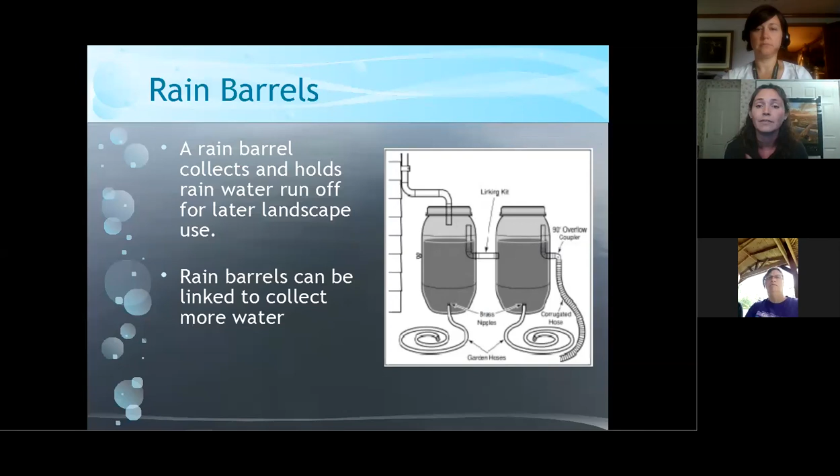A rain barrel is a way for us to collect rainwater that's coming down. It allows us to collect it and store it for later use. You can have a single rain barrel, typically ranging between 45 and 60 gallons per barrel, or you can link multiple rain barrels together in a daisy chain to increase your capability to store that rainwater. Rain barrels have a lot of benefits.

When we think about storing rainwater, why would we want to do that? A major reason from an environmental standpoint to use rain barrels is to reduce stormwater runoff. Think about every time we have a rain event, that rain has to land somewhere. It might land on a grassy field where the soil can soak in some of that water.

But a lot of times it's falling on an impermeable surface. Think about the world we live in today, especially in an urban or suburban area - we have rooftops, pavement and asphalt that cause that water to run because it can't soak into those surfaces. That water gets diverted down into our storm drains, and that storm drain carries that water out to your local stream. If it doesn't make it into the storm drain, it can run across your property.

You see in some of those photos, as we increase the amount of water running off these surfaces, the speed increases, the volume increases, and it starts to carry a lot of soil with it. Then we can see a lot of erosion problems. We can have drainage issues, flooding issues, and water can cause a big mess if it's allowed to build up in this manner.

The erosion you can see in the bottom right picture is kind of an extreme circumstance - you see the house with the porch on the stream bank, and you can see heavy erosion coming off of that stream bank.

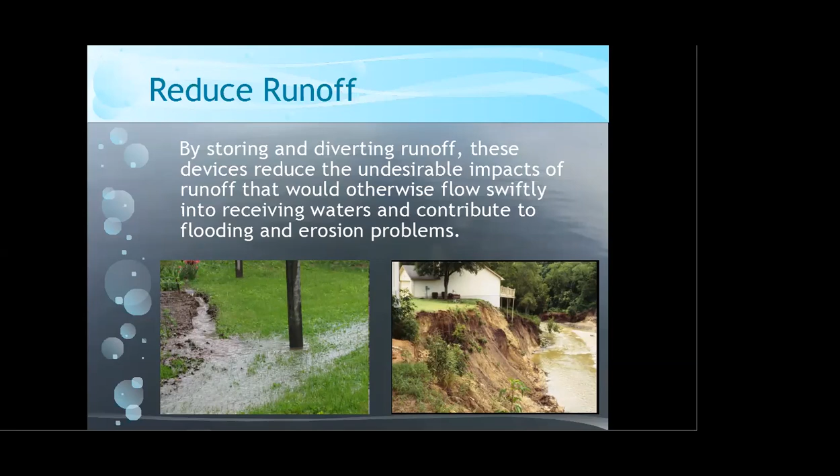Not only does it take the soil with it, but it also takes any type of pollution that is on that soil or on the ground. When we talk about pollution in our environment, we talk about point source or non-point source pollution.

Point source basically means we can point to where that pollution is coming from - for instance, a particular factory, or we can say this chemical is coming from here. But over half of the pollution problems we see in this country, the EPA has attributed to what we call non-point source pollution - that's the pollution that you and I make every day. So let's think about those different types of pollution contributing to non-point source pollution.

Sediment is our number one pollution issue. That's all the soil we saw in the previous photos from erosion getting carried by the water. When we look at the Ohio River's number one pollution problem, it's sediment—all of this extra soil washing into the waterways. Now, all of this soil causes several different problems.

Let's think about the river as an ecosystem. Things live in the river. So when you have animals such as fish that use gills, those gills can get clogged with soil, and it can actually cause fish die-offs. It also causes issues for other aquatic animals in the stream system.

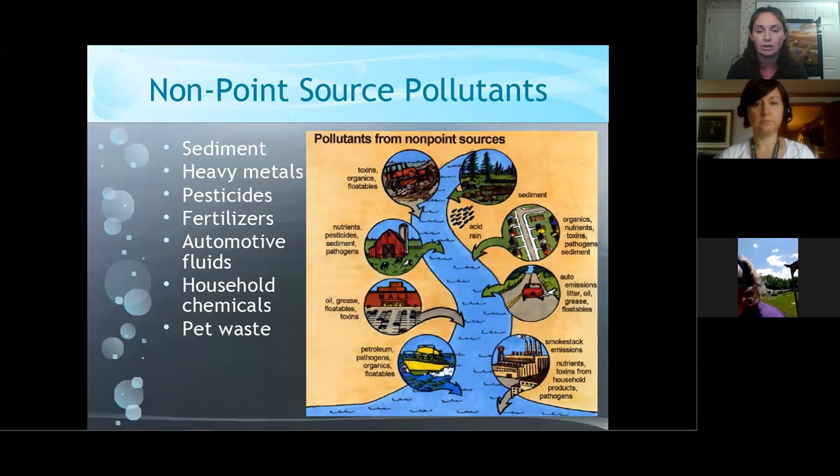It also helps conserve water and conserve your money, and I think we're all always looking for ways to save money. When we think about how we use water around our property, whether watering flowers or a garden, municipal water systems show that about 40% of domestic water consumption comes from these practices.

Especially during high water use months, like summer here in Ohio, when we're using a lot more water because it's the drier season, by using water we've collected and stored in our rain barrels, we're not using as much water from the municipal system, and our water bill ends up a little lower as well.

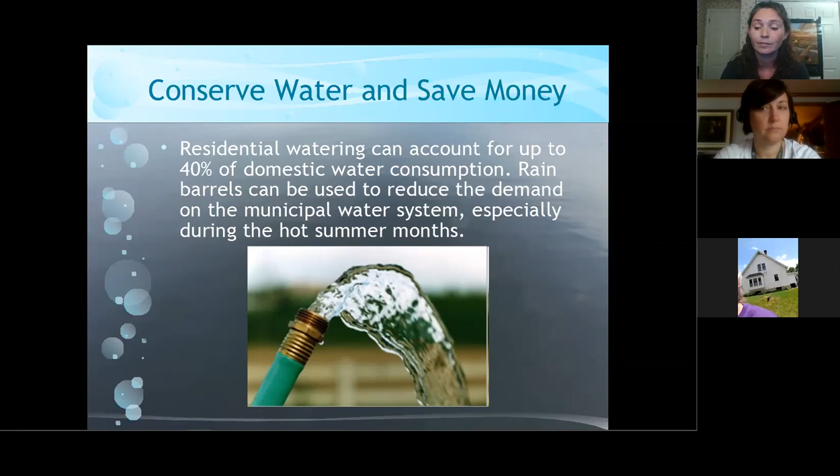Now we can use that rainwater for lots of things—again, watering our lawn and garden, this is just natural rainwater. It's great because it's what would have been watering the garden anyway on a rainy day, but we have a little bit of control and can water it when our plants actually need it.

You can also use this water for different kinds of washing—you can wash your windows, wash your cars. I've even had people tell me they like to wash their hair with rain barrel water because it makes their hair softer.

If you're doing that, big thing to notice is it's not for human consumption. This is not water you want to fill your drinking bottle with. It has not been sterilized or filtered, so we don't want to consume it. In fact, a lot of kits for creating rain barrels come with labels you can stick on just in case you need that reminder not to drink the rain barrel water. But it is very useful for a lot of different things.

Now, we've got the benefits of rain barrels, we know why we want to use them. But how much water can a rain barrel collect? Well, mathematicians have helped us out with this, and we have some formulas we can use to do these calculations. So here's an example.

First, we have to know what is the size of the area causing the runoff. In the case of rain barrels, it's often our roof, the impermeable surface the water runs off of into our gutters and down into our rain barrels. For instance, if you have a 1,000 square foot roof, then a one-inch rain event can produce approximately 600 gallons of water. So a lot of water can be running off of our houses.

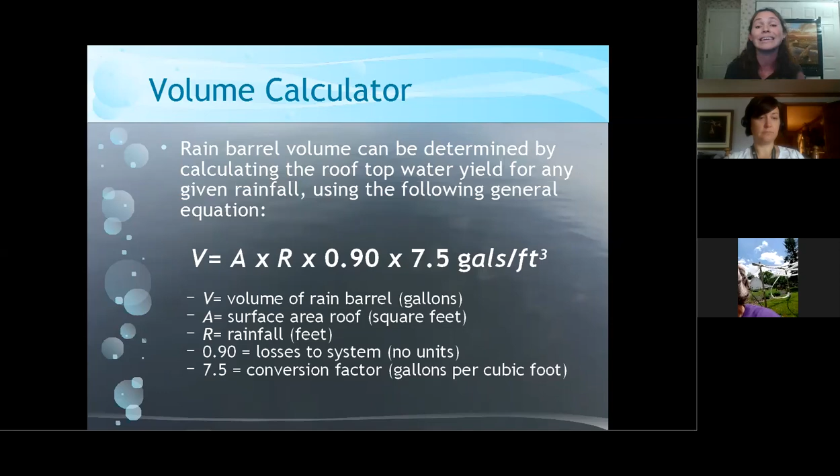To look at another example: if I get a 60-gallon rain barrel, then I know it can handle approximately a half-inch rainfall event if it's connected to a downspout where the roof is giving us about 215 square feet.

So when thinking about installing rain barrels on our property, we have to consider which downspout we want to attach our rain barrel to, because that's what's feeding water into our barrel. You have to look at your roof and how it's sectioned off, which way the different pitches of your roof run, and then estimate, for this particular downspout, what area of roof is contributing water to my barrel. This gives you an idea of what size barrel to place in that area, or if you need multiple barrels. It really depends on what you're going to use the rain barrel water for, and how much you want to have stored on hand.

Besides which downspout, there are other things to consider about where to place this barrel. For the rain barrel, we want it on a sturdy raised surface. The reason we say raised is we have to think about pressure. With a rain barrel, gravity is what gives you your water pressure. So if you want to hook a hose to your rain barrel to water a garden away from it, an elevated rain barrel gives you more water pressure passively. The more full your barrel is, the more pressure you get, but raising the barrel also helps increase your pressure.

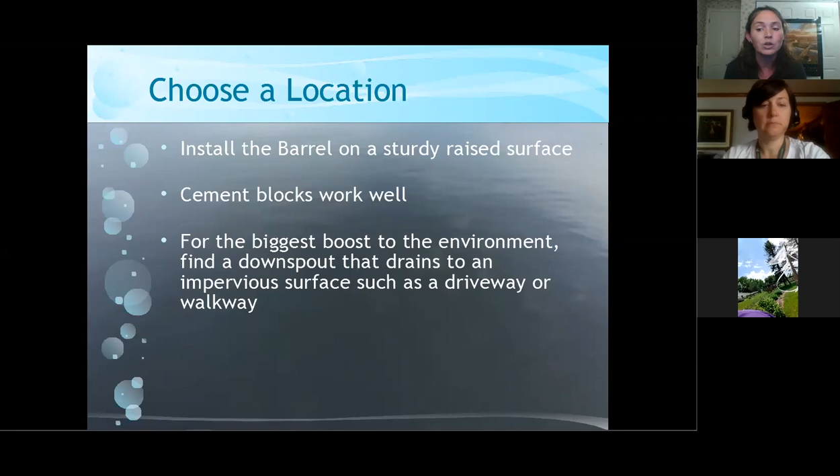When thinking about which downspout we're going to put the rain barrel on, we can also think about that from an environmental standpoint. Think about those hard impermeable surfaces we talked about. If you have a downspout pointing toward your driveway, which runs straight out to the gutter and down the storm drain, placing a rain barrel there can have a bigger environmental impact because it reduces the stormwater flow going directly into that storm drain, as opposed to a downspout that's already running into a grassy area and allowing that surface to soak in some of that water. That's something else to consider when deciding where to place your rain barrel.

Some safety considerations of rain barrels: a lot of times people are worried about mosquito breeding when thinking about stationary water sitting in one spot with a closed rain barrel system. The kind of rain barrels we actually get from our suppliers are rain station rain barrels, and they have a lid that goes on top, a domed lid to encourage water to run off.

If you're using a different type of barrel, and there are lots of different options out there that we'll look at, you might have one with a little lip on top where a bit of water could start pooling. You can drill a small hole through that lip to allow it to drain out. Some styles also don't hook into your downspout, but rather the downspout just drops into an open top of the barrel. If you choose an open top barrel, we really recommend putting a fine mesh covering on top to prevent mosquitoes from getting in and breeding.

With the rain station closed system rain barrels we have, because of the way it attaches to your downspout, when it overflows, the overflow will just continue down your downspout and discharge wherever that downspout is pointing. However, if you cut off your downspout and put in an open top rain barrel, if it overflows, is it going to overflow next to your house foundation? Because water, just like it can erode stream banks over time, will weather and break down the concrete foundation of your house. So you want to be careful about where the water is going to overflow to.

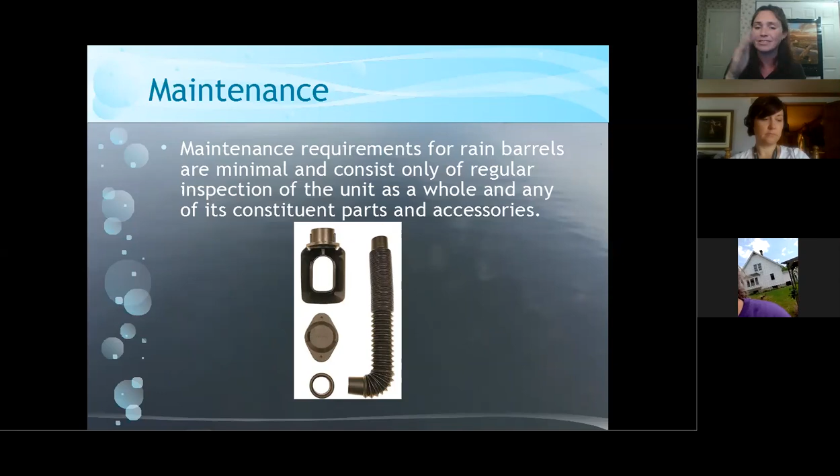In this picture, these are a few pieces that come in what's called a diverter kit. Diverter kits are ways that you can turn different types of containers into a rain barrel. So you've got hoses, you've got plugs, and these are rubber. They hold up for a long time, but over time they can start to crack or break. If you don't have good seals, your rain barrel is not going to work appropriately. So you may have to replace single pieces of the system over time, but generally you're just inspecting to make sure everything is good and secure and snug fitting.

You also have to think about where the water is coming from to my rain barrel. If there's a lot of debris on the roof, or in the gutters or downspouts, that can impact your rain barrel. If any of you out there are like me, I know when it comes time to cleaning my gutters, that is not a job that I'm looking forward to. However, because I want the benefits of my rain barrel, it's kind of an extra motivator for me to make sure that I'm staying on top of keeping my gutters clean.

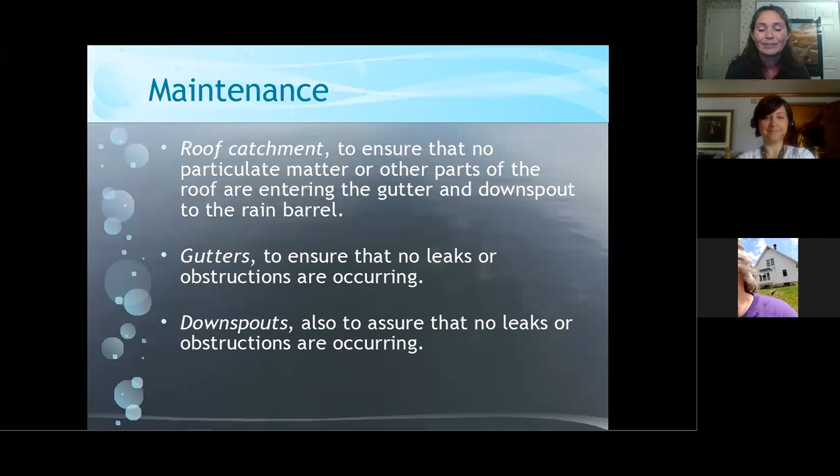You also can check the entrance to the rain barrel. In this picture, this is showing that rain station style closed system — you can see the hose that is connected into the downspout there. You just want to occasionally make sure that there's not obstructions in there that would be preventing water from getting into your rain barrel, and also check the top of that rain barrel for any leaks or for that seal.

Now with these rain station rain barrels, you might have noticed in the very first picture at the beginning of the presentation that these tops can actually turn over and you can plant flowers and things in the tops. It makes your rain barrel really beautiful — it's another place to plant flowers. So that's another option with these rain barrels. But even if you do that, you still want to make sure that the seal around there isn't allowing things to get into the barrel.

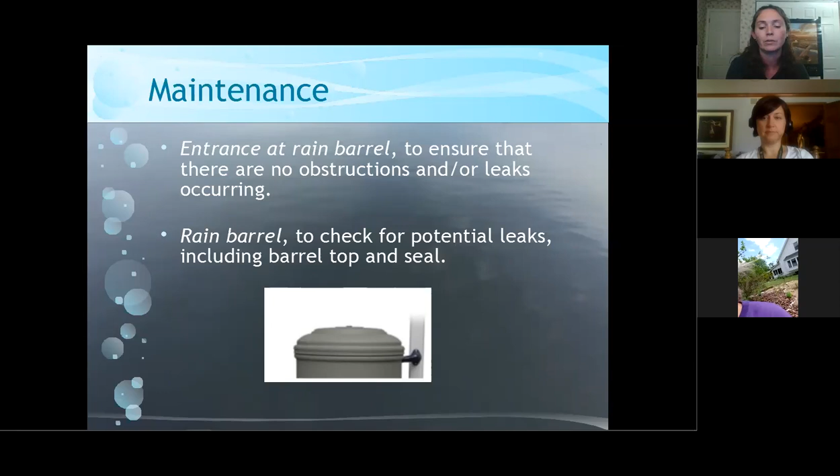Again, all those little pieces — your overflow pipe, is my spigot working correctly that I'm going to use to get the water back out of my barrel? Any accessories? Do I have multiple barrels that are linked together? I'm just going to check those hoses to make sure that everything's working properly. But other than that, your rain barrel system is just going to collect rain for your use.

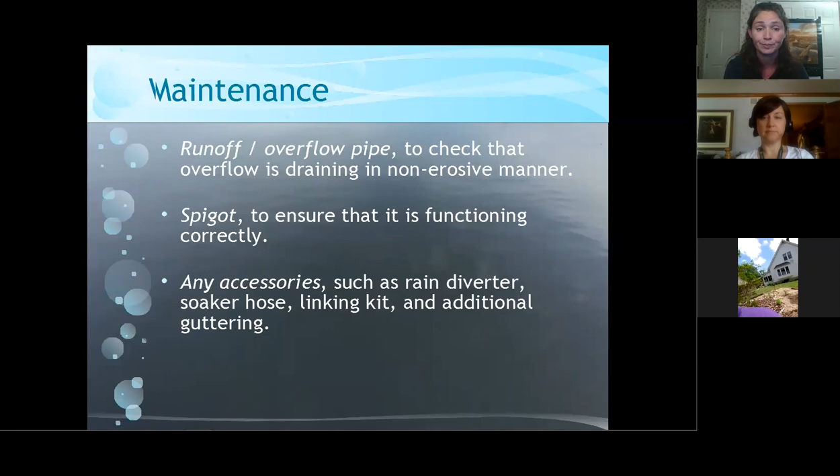Here in Ohio, we do have to think about winter prep. Obviously our winters can get pretty cold where we're going to have freezing. What we recommend is that in the winter, you actually disconnect your rain barrel from your downspout. You will get pieces in your diverter kit that actually will plug up your downspout for the winter time. This piece — what I recommend is have a place in your garage or a shed that you kind of store it, because it sometimes just walks off and then you can't find it come winter time when you're trying to winterize your rain barrel system.

So just kind of have a place for it. But again, if it were to become lost, these individual pieces of the kits can be purchased — I think that particular piece is like $6 to $8 on its own. We recommend that you either empty the barrel completely and leave your spigot open, or some folks choose to maintain it at about half full. You just want to make sure that the amount of water in your barrel is enough that it's not going to freeze easily. I tend to just empty mine to make it easier.

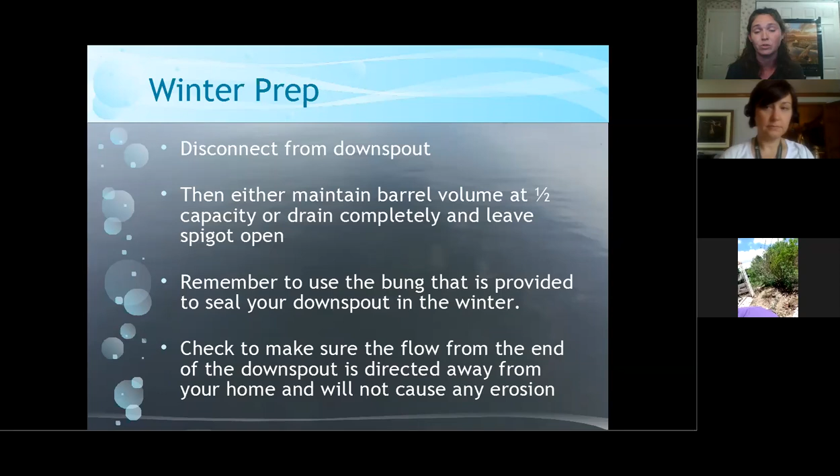Again, when you take the barrel off, especially if you have an open top system where the downspout was just draining into the barrel, think about: if I remove the barrel, where is that water now going for the duration of the winter? You want to make sure that wherever that water flow is now going, if it's not to the barrel, is it going to cause erosion issues? Is it going to impact my foundation?

Here at the Soil and Water Conservation District, we'd be remiss if we didn't point out other ways to help control non-point pollution. Rain barrels are an excellent way, but there are other things we can do.

Think about sedimentation, the number one pollution problem, all the soil getting washed away. A lot of soil gets washed away because it's left bare. So we encourage people to cover their bare soil.

You can plant native plants that are already conditioned to the climate. They're really low maintenance. We talk about cover crops a lot in the soil and water world.

A lot of times we're talking with farmers who plant cover crops over acres and acres of fields after crops have been harvested. But we can also do that in our own gardens at home—a lot of times after harvesting, we have these bare patches.

You can plant annual grasses, clovers, or different grains, because these plants help hold the soil in place. It's going to make your garden healthier too, since it helps hold onto that topsoil where a lot of the valuable nutrients are.

If you have a landscape with really steep slopes, the steeper the slope, the faster water runs down it, and the faster water moves, the more erosion it causes. So you can do landscaping like terracing, which slows the water flow down and reduces that erosion problem.

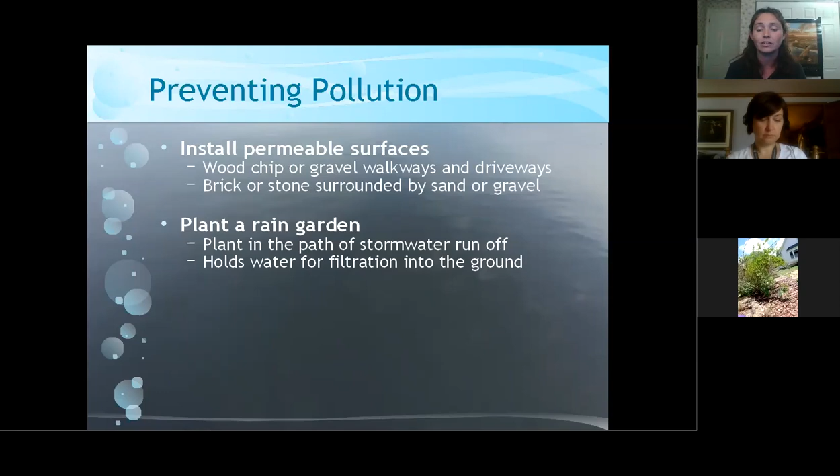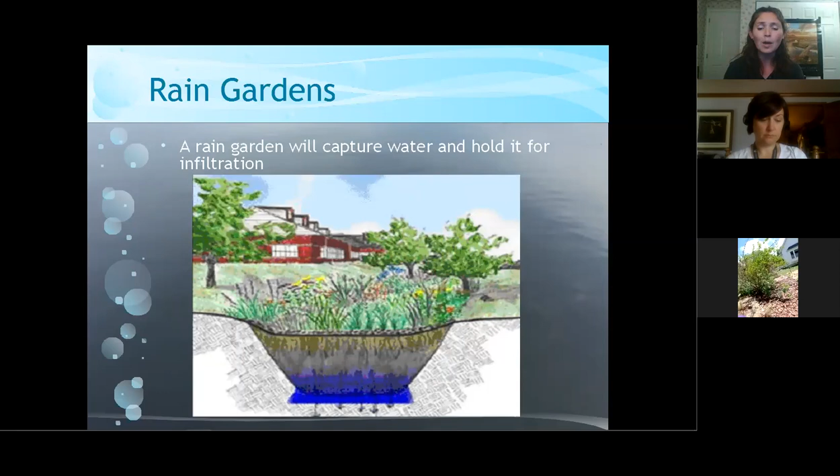The basic shape of a rain garden is kind of like a bowl, so it allows the water to catch and soak in. Plus, rain gardens can be very beautiful.

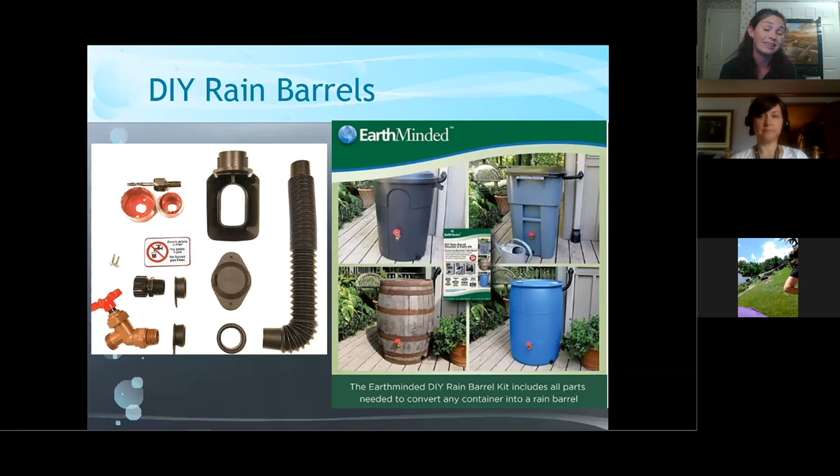Earth-minded diverter kits you can get at many different retail stores. Home Depot sells them, Menards sells them, Amazon sells them. I've seen them anywhere between $30 to $50, so it just depends on which retailer you go through as far as purchasing those kits.

So here's some pictures from past in-person workshops that we have done. You can see those drill bits just attach to your typical power drill. There are instructions about how far up those drill holes should be placed, and whether you're going to place it on the right side of your barrel or the left side, which is going to determine what side of your downspout you're putting it on. So it's important before you start to drill into your rain barrel that you know where it's going to go in relation to your downspout, because that's going to affect what side of the barrel you're going to be drilling on.

Now, Butler SWCD, our colleagues in Butler County, have a great educator named Lynn White. I do a lot of programs with her, and they made a really great video. It's only about 2 minutes long, and I'm going to share that with you. These are the steps that we would take in our in-person workshops. So let me switch my screens here.

All right, Cindy, can you shake your head? Am I good? Okay, awesome.

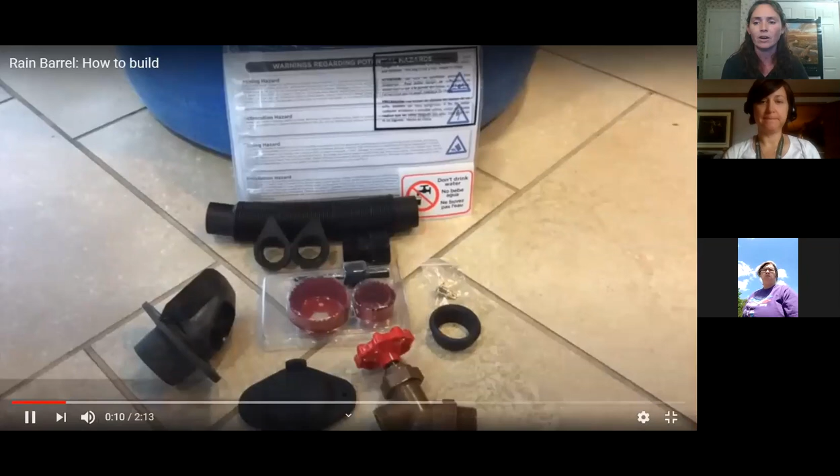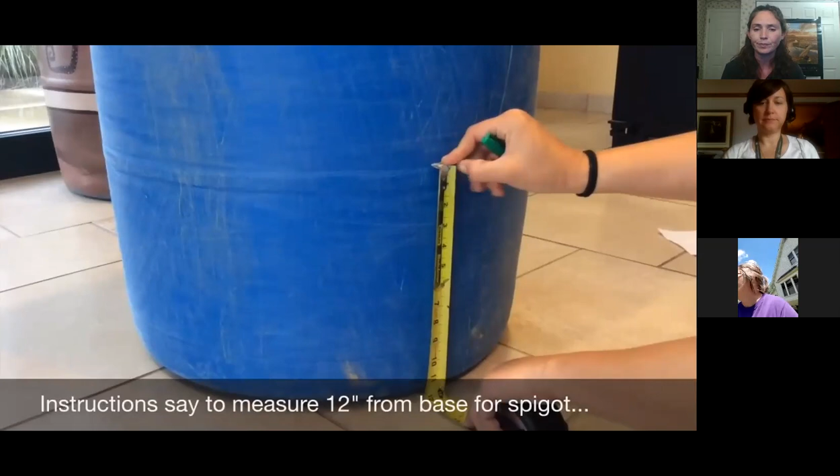You can see, so that is the Earth-minded diverter kit there. And those are the different sizes of the drill bits that you need. This is for measuring for your first spigot.

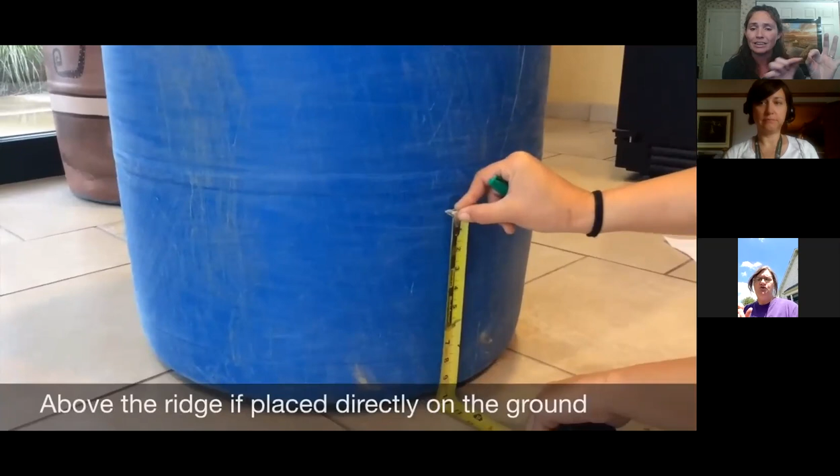And this is a tip that we always point out as well. Because of the type, if you get a drum barrel, you don't want to drill into the ridge there. So you're actually going to go a little bit above what the instructions tell you, so that you can have it on a flat surface as opposed to that ridge.

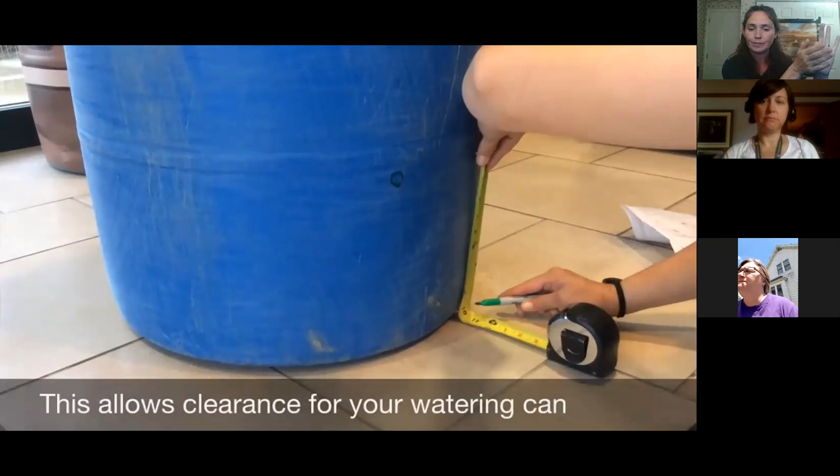So you always want to mark out where that is. They always say measure twice, drill once.

You can see that they have flipped the barrel on the side and they're sitting on the barrel. This helps the barrel from rolling back and forth, and it's going to allow you to drill straight down to keep that hole exactly where you need it to be.

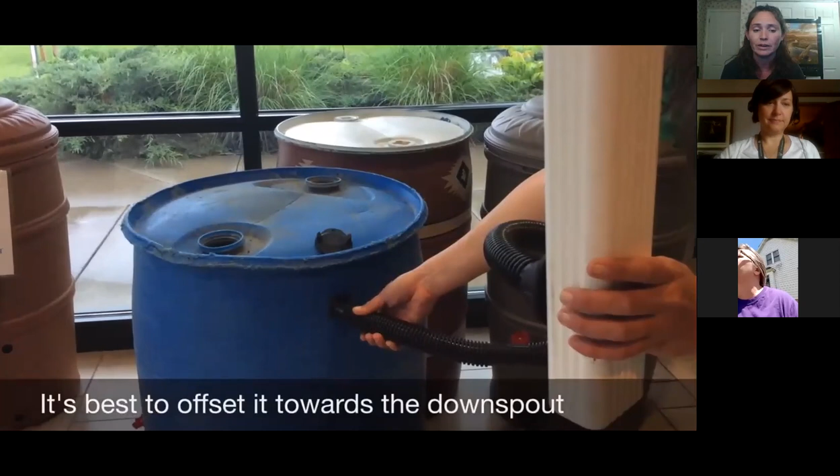You're going about 3 inches from the top. This is going to be where you actually will attach the hose that will attach to your downspout.

So again, the importance of keeping your barrel secure and level and steady, because it's heavy and you want it to be secure.

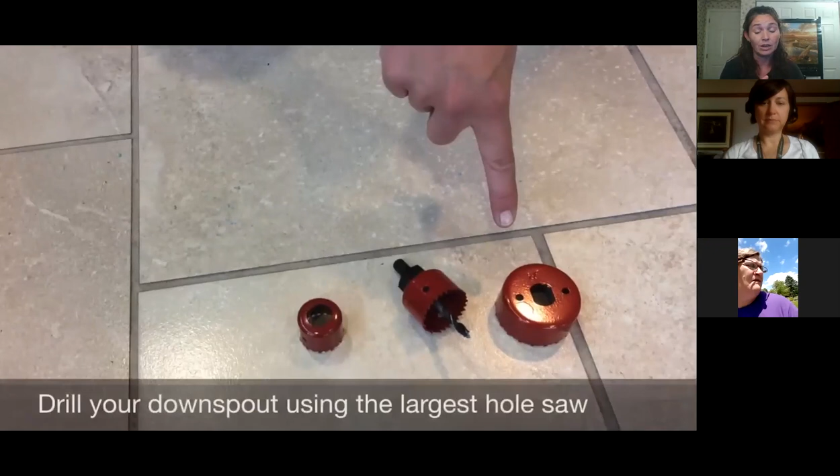Now with downspouts, we do have different sizes. You need to measure your downspout, because the most common kinds are either 2 by 3 inch or 3 by 4 inch. These diverter kits can fit in either of those downspouts. The one downspout type that will not work with this system are round downspouts. Some folks do have round downspouts, and they do have diverter kits you can use for those. However, the earth-minded ones will not work for a round downspout, so that is something to be aware of.

Let me get you back to my presentation. So that is on Butler County's YouTube channel, so you can watch that video. I will also provide you the link with all this material at the end of the webinar, because it's helpful to see how that process of drilling into your barrel works.

Now, you can also have some fun with your rain barrels, especially if you go the route of a repurposed 55-gallon drum. Sometimes they're not the prettiest, so we can make our rain barrels aesthetically pleasing by painting them. The Cincinnati Zoo partners with one of our collaborators, an organization called Save Local Waters, and they do a rain barrel art project every year where local artists paint rain barrels. They make some beautiful rain barrels.